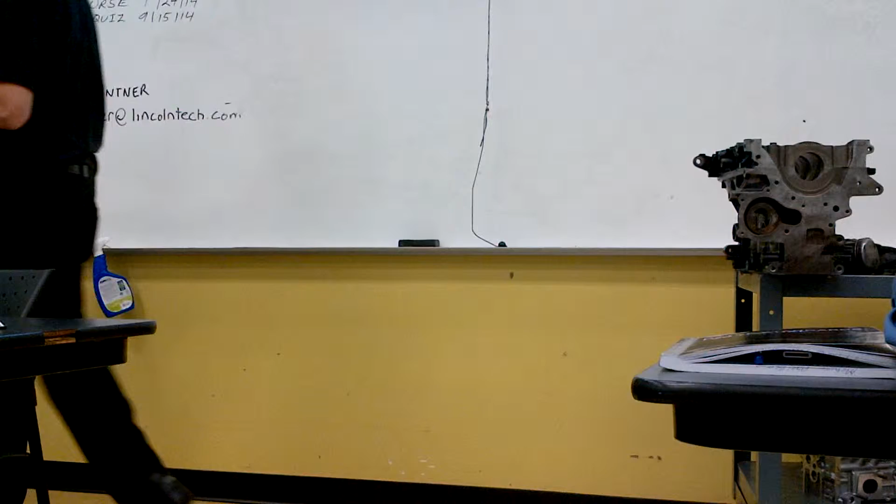Around your year, they had a problem with the 2-liter engines consuming too much oil. They had bad rings in some of them, and we had to do oil consumption tests, and it was bad. We had to put rings in the engine. But how do you tell the difference between rings and valve seals? Diagnose them. I'm picking on the Volkswagen because I work on them all the time, that's all.

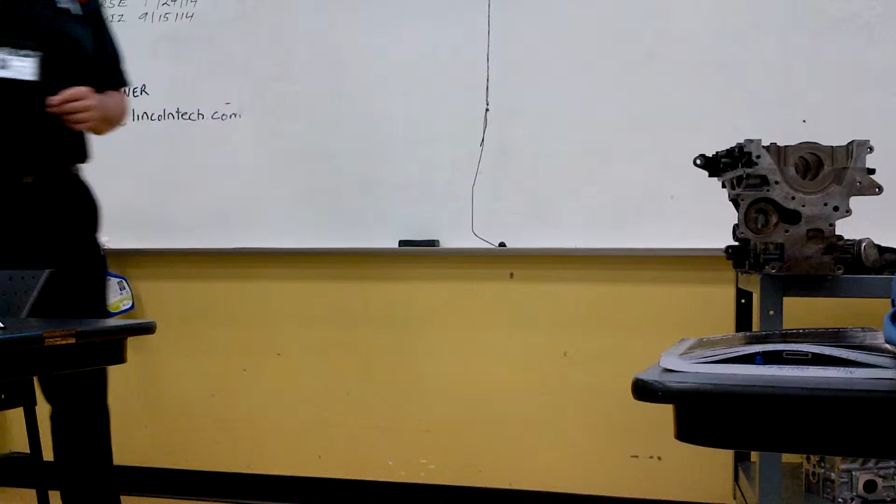If the blue smoke comes out under deceleration, it's most likely valve seals. Because that's when the high vacuum draws that oil down past the valve seal and the valve guide, and that oil is burned. If it smokes on acceleration, that's most likely piston rings.

You're going to go ahead and do a compression test and a wet test, and that should also further indicate you got excessive blow by. What other testing do you do? A dry and wet compression test - if it goes up significantly, you got a ring problem for sure. You can also do a cylinder leakage test, in which case if you hear the air hissing out of the oil filler cap or the dipstick tube, it's blowing past the rings.

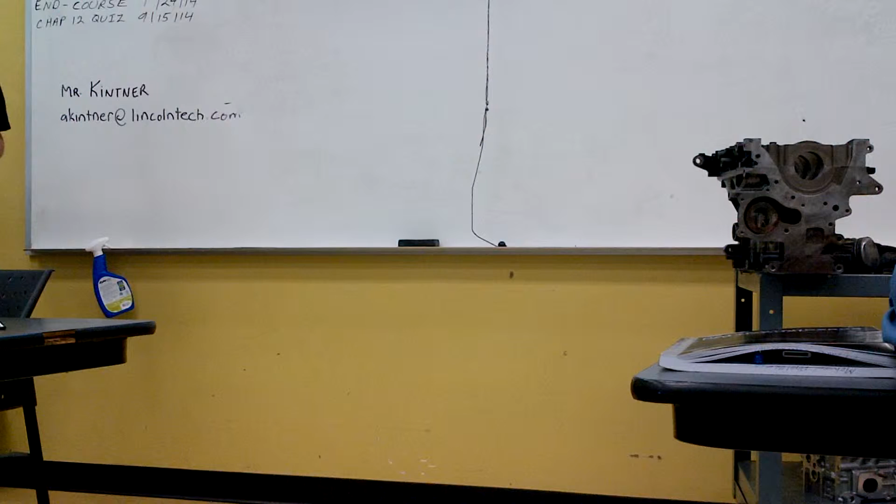External leaks: gaskets and seals. Oil usage increases engine wear because the oil level goes down, the oil temperature goes up, the oil doesn't lubricate as well. Common external leaks - all the gaskets and seals in the engine, except for the cooling system gaskets and seals, are common places for oil to leak, and all of them will leak.

Sludge - what's sludge? Burnt oil, yes sir, exactly. It's cooked motor oil, oxidized motor oil. Pour a pan full of motor oil on the stove and heat it up and cook it - and mother's going to kick you - but it will turn into sludge. It will thicken up and turn into a paste, a gel-like paste. When the oil is not liquid and it turns into a gel, it doesn't circulate. It sticks to stuff and it continues to bake and continues to bake.

Anybody seen a sludged up engine? Seen sludge under a valve cover? Nasty, thick, grease looking - it's not motor oil. You will, have patience. It'll block up the oil passages. Parts that are supposed to have oil splashed to them, won't. They'll be covered up with sludge and they won't get the oil that they need.

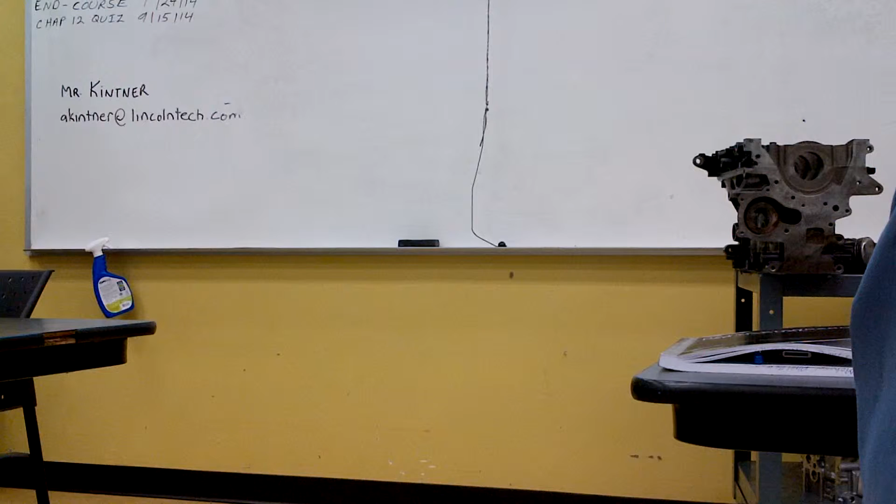Signs of sludge could be low oil pressure, increased oil consumption, increased emissions, poor drivability. There's a big sign of sludge and plugged up - that's when you're doing an oil change, and you pull the oil filler cap off to put the oil in, you see that thick, black, grease, nasty looking stuff on top of the engine.

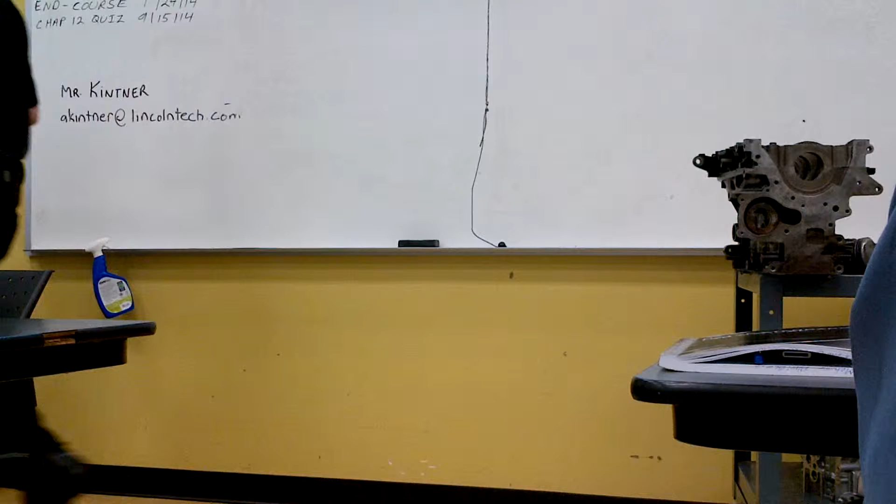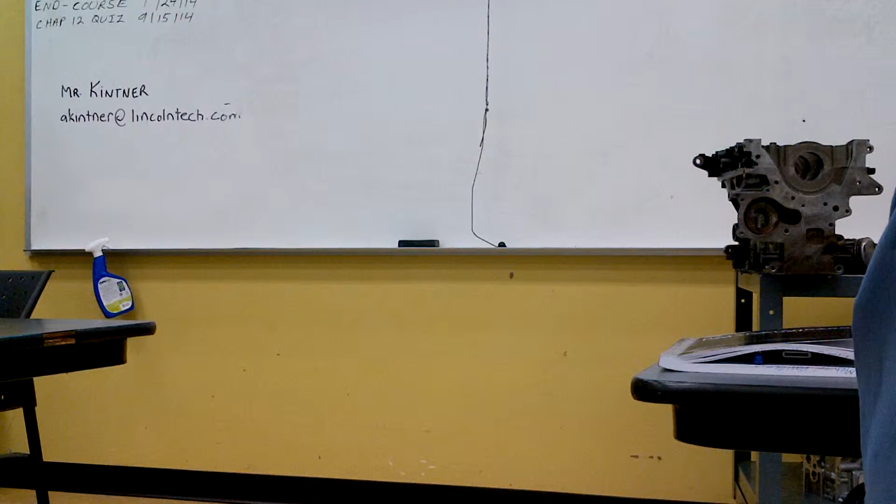You're working on an engine. You have an oil pressure problem on the engine. You've gone through your testing. You've determined that the bearings are bad in the engine, and you're going to have to put new bearings in the engine. When you start taking this engine apart and you find sludge, you need to look very closely at all the components in the engine for wear. That sludge is blocking stuff up - preventing lubrication. There may be more damage than just the crankshaft bearings.

You look at your camshaft, see that's not worn. Timing chain and guides can be extremely worn. The sludge will certainly block the oil. The oil that a timing chain gets is oil that runs back, it's on its way back to the oil pan. And if it's all turned to sludge, they're not getting lubrication.

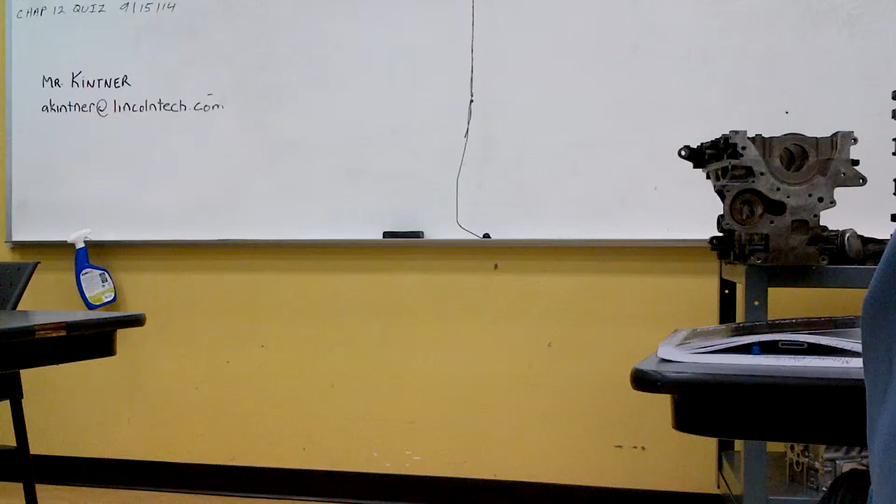How do you get that out? Well, there are flushing compounds you can use to break down the sludge and flush it out of the engine. All oils have stuff in them that makes them sludge resistant. There might be some that think they have more, but all oils have it, and they have detergents in them that help clean the sludge out.

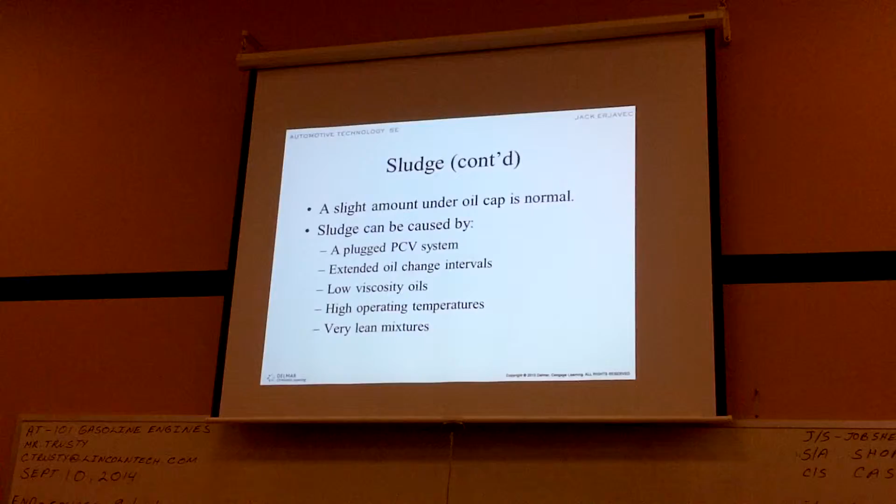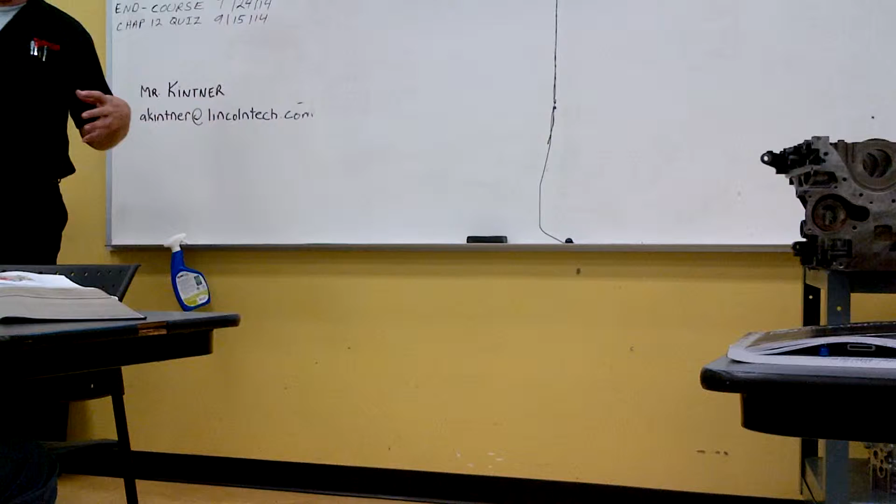What causes that sludge? What causes it to burn? A plugged PCV system. What's it do? It allows air to circulate through the crankcase. The fumes, the blow-by that's inside the engine, down around the crankshaft and up in the valve cover, is basically a vacuum cleaning system that circulates the air. Positive crankcase ventilation forces the air to be ventilated through the system.

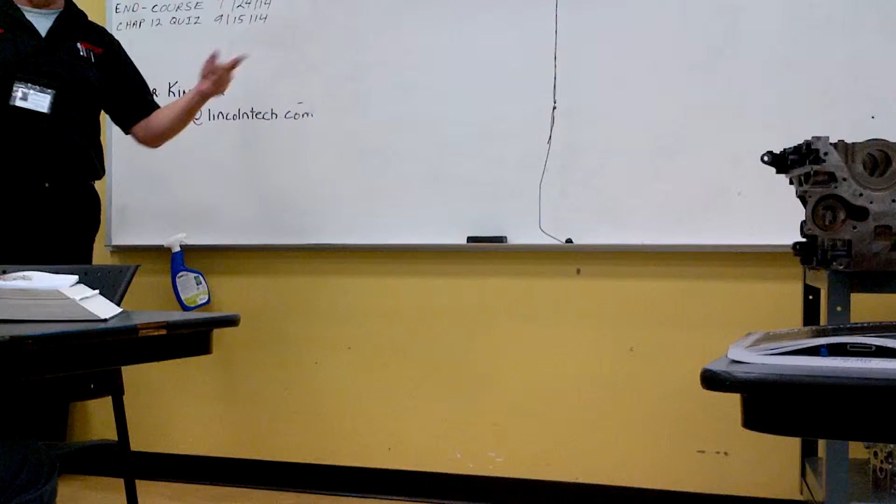A plugged up PCV, how do you check it? You shake it and you hear it move if it's not stopped up. But when I did one the other day and took out the PCV valve, it was stopped up.

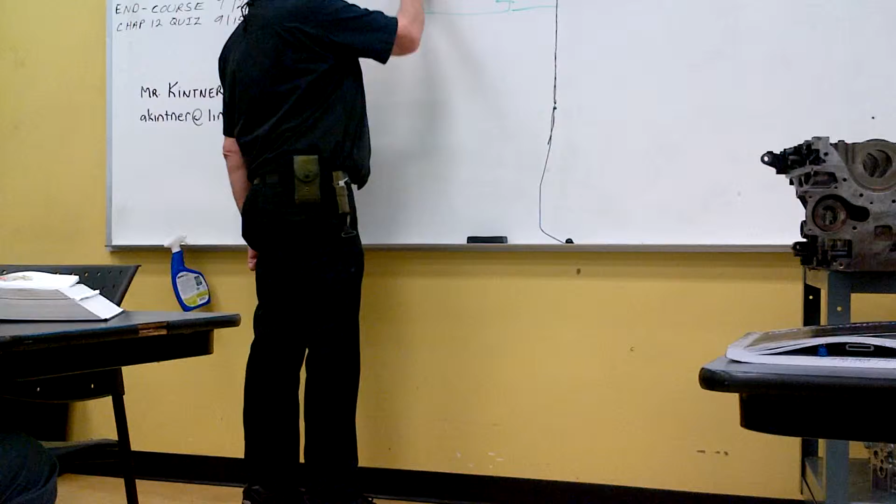One of the first signs of a stopped up or malfunctioning PCV system is in the air filter. When you do an oil change, you check the guy's filter, because if it's dirty that means he needs maintenance, and you're going to sell him an air filter or a 30,000 mile service. If the air filter has motor oil on it, it's because the PCV system stopped up. The PCV valve at the top of the engine should be taking this off back into the intake, where it goes into the engine and gets burned. The other end of the PCV system goes into the air filter, where it draws clean air into the engine.

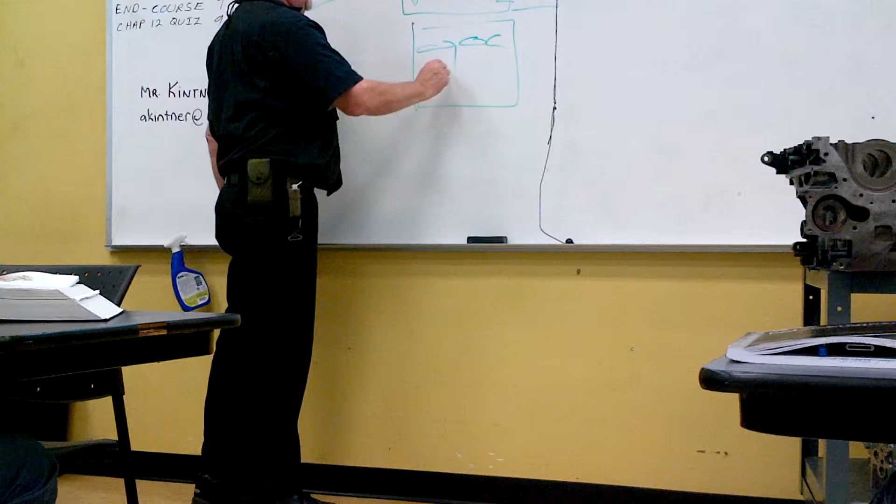If this gets stopped up, the hose gets broken or clogged, or the PCV valve is stopped up, the blow-by past the pistons still builds up in there. Now it's simply going to back up and go out the wrong way, depositing oil on the air filter. So if you see oil on the air filter, there's a problem.

I saw that problem when I was working on my friend's car on Friday. You got oil? Yeah, an oil spot on his filter. It was on the 5.7 liter engine, the one that you have.

Look at the PCV system, replace the valve, and check the hoses to make sure they aren't plugged up or broken. I cleared out the hoses and cleaned the PCV. That should do it, everything shook and made a clear passage right back to the intake. But is there anything else to help clear out the sludge, or should I help him do it?

It's got sludge in the engine? Well, the PCV valve itself was all sludged up. Put a new one in. What I'm saying is, what about the rest, the cam and stuff like that? Is there anything for the sludge inside the engine? Yeah.

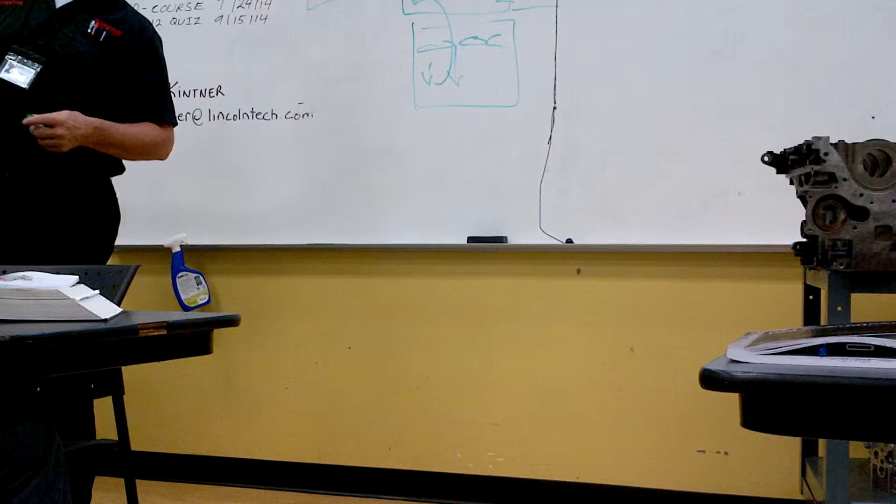Since we're talking about it, my recommendation would be to change the oil and step it up, changing it more often. What causes sludge is an extended oil change interval, you don't change it often enough. There's detergent in the oil, so instead of going 3,000 miles, change it every 2,000 miles for 4 or 5 times. You'll get more fresh detergent in there, and more of the gunk cleaned out.

Flushing the engine, they sell chemicals you can put in the engine to flush it. The way they all work is you drain out a quart of oil, or if it's a quart low, you add this solvent to the oil, then start it up and run it for half an hour or 15 minutes. You run the engine, the solvent dissolves the sludge and breaks it down, and then you change the filter.

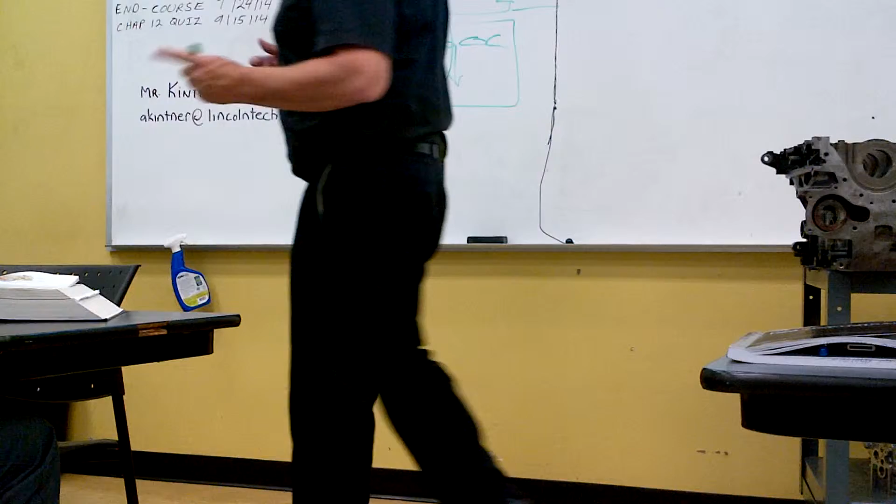Almost all of them instruct you to take the oil pan off, clean out the oil pan, and clean out the oil pickup screen. Nobody ever does that. They just do the flush, drain out the solvent in the oil, put a new filter on, and fill it back up. The problem and the danger there is that many manufacturers prohibit it, meaning they'll void the warranty if you do it.

The problem is that solvents do break down the sludge, but they don't break it all down in 15 or 20 or 35 minutes. So whatever got broken down ends up in the oil pan. If you did it right and cleaned the screen, you're probably okay, but you may not be. There's still sludge up here, and now it's got solvent on it. It's starting to break down, but it hasn't quite made it yet.

Now you put the new oil in, you go driving it, and gradually it continues to break off and flake off, plugging up the screen. The oil light comes on, Joe customer drives it back to the shop, gets about a mile away, and it stops running. They call it in, the engine's locked up. Why? Because you flushed the engine. That was the cause of the engine locking up. So flushing is to be done with a huge grain of caution, something you want to avoid if at all possible.

You also need to know which manufacturers—Honda, Nissan, Toyota, General Motors, Ford—say do not use flushing compounds in their engines. If you do, and the car happens to be under warranty, you're going to void whatever warranty they have. Anybody know what a silent warranty is?

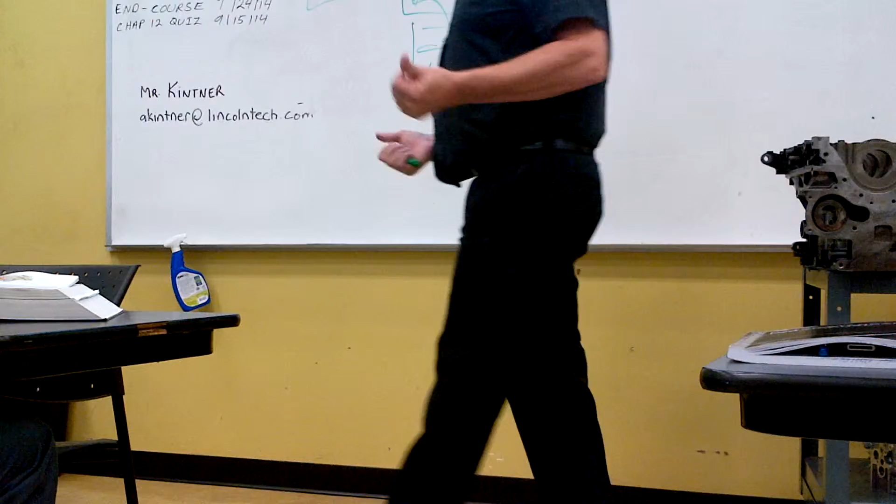The manufacturer will, as a courtesy, extend warranties on a lot of things. Like if you bought a new Honda with a 50,000 or 60,000 mile engine warranty, and you've taken care of it and show you did your oil changes, and the engine locks up at 78,000 miles, quite often Honda will pick up the tab or part of it. But if anywhere in there you had it to Jiffy Lube and they did an engine flush on it, you're on your own. They won't touch it, won't help you at all, even if it's still under warranty. If they find out it was flushed, they're off the hook. See you later, that's Jiffy Lube then.

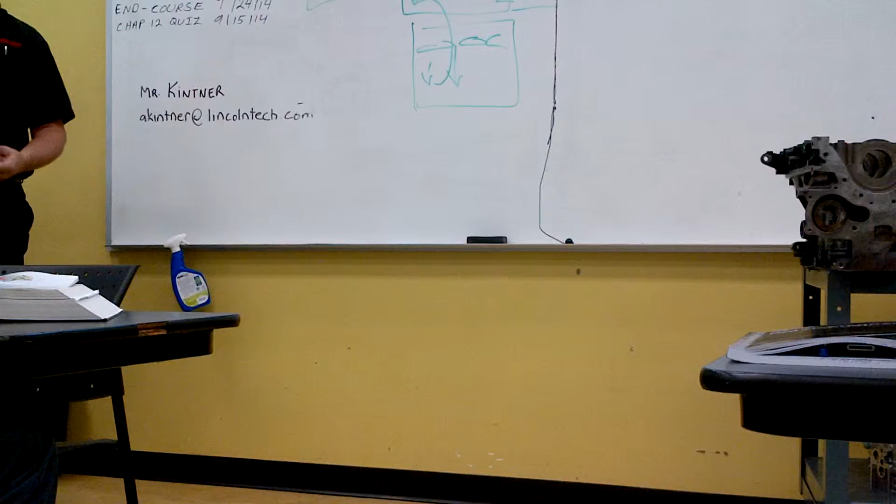They do that, so flushing is something you've got to be very leery of. My recommendation for your friend would be to change his oil every 1,500 or 2,000 miles, 3 or 4 times. Get fresh oil in there and gradually move that sludge out as the detergent in the oil can pick it up and handle it.

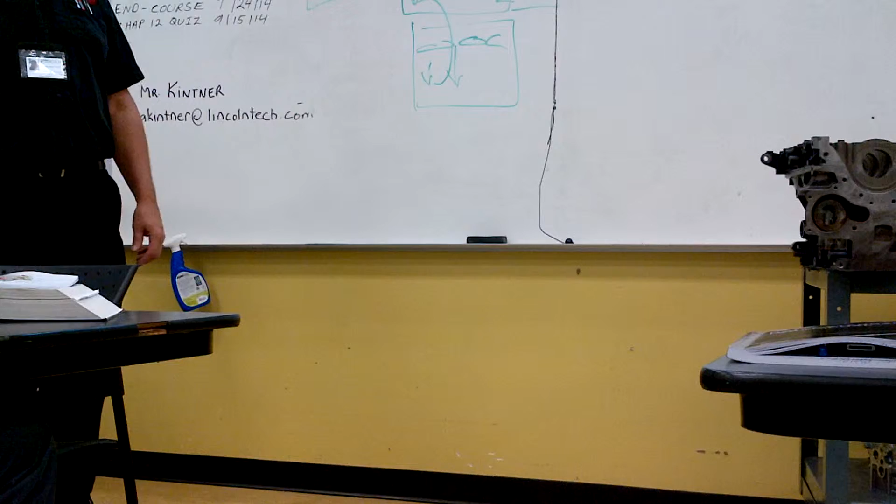Sludge is caused by plugged PCV systems, because you have more combustion particles and byproducts and temperature going into the crankcase, into the airspace, cooking that oil. It's not being ventilated, it's cooking the oil. Extended oil change intervals are a big, major cause of sludge buildup in the engine.

Low viscosity oil—if you use too low a viscosity oil, why would that cause sludge? It's not too thick, it's too thin, low viscosity. How's that going to make sludge? It's not about keeping the oil in, it's about what it does to the oil. It's going to cook it. Write it down: cook it.

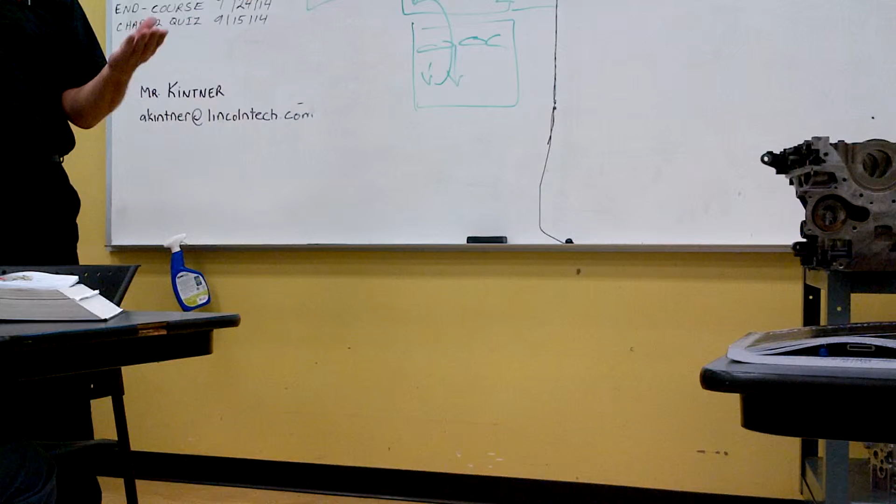Because low viscosity oil is going to run hotter—higher temperature, temperature does it. High operating temperatures. Forget about lean mixtures, that doesn't happen anymore, but in older engines with carburetors, lean mixtures would result in high temperatures also. High operating temperatures, even marginal overheating, can cause it. If the engine is supposed to run at 230 degrees but the radiator is a little bad, a little clogged up, with scale buildup inside, it's not cooling quite as well as it should, and it's running 245, pushing 250. It's still not overheated, but it's running a little hotter, and it's going to form sludge faster.

We already talked about flushing the system—adding solvent to the engine, cleaning and draining may help remove sludge. Refer to manufacturer service information before flushing, because if the manufacturer says don't do it, you're putting your neck on the chopping block if you do. And if something bad happens and they come back and say Honda says do not do it, they're going to expect you, or your shop, to pay for their engine if it has a problem.

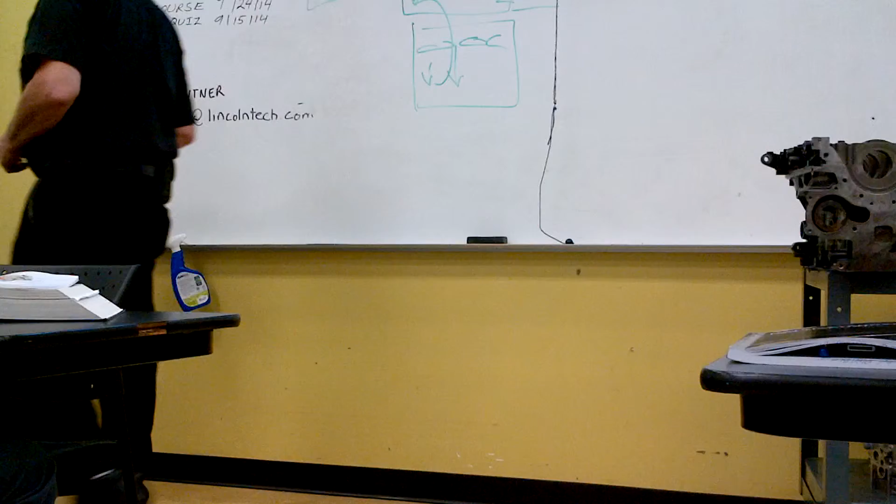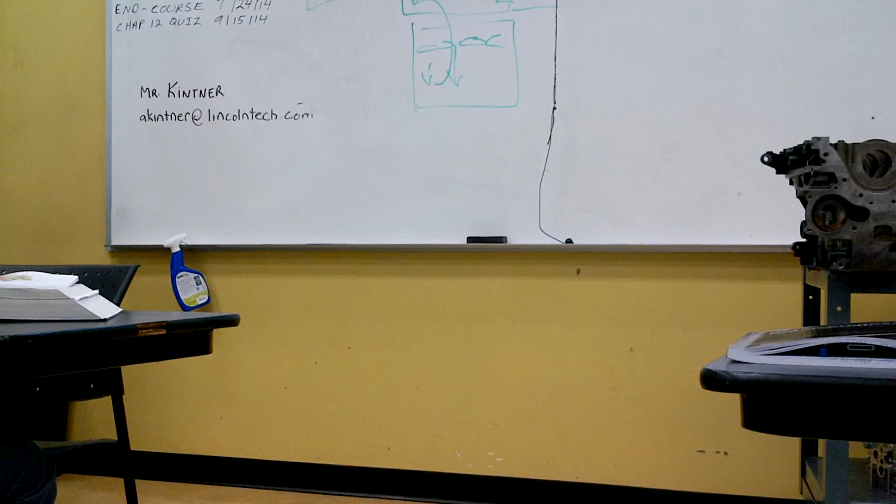What about flushing a perfectly good engine that doesn't have any sludge in it? It doesn't need it, but if it doesn't have any sludge, you don't really need to sell a flush, though it's not going to hurt anything. It's like flushing the toilet when it's got nothing but clean water in it, versus flushing it when it's got nothing but dog water in it.